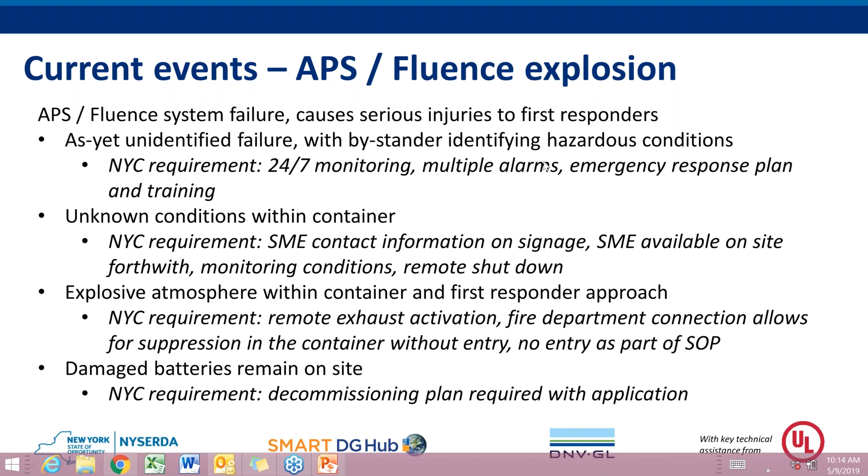Thanks so much, Paul. We wanted to go through that event specifically, with Paul's additional overlay of expertise from his time in New York City, to make sure we talked about current events, but also grounded the conversation in why we're doing this process. At the end of the day, we're trying to get safer energy storage systems, both for day-to-day use and for first responders. I'll hand it back to Derek to recap our process to date, then over to Mike for the technical aspects and desired outcome. If you want more detail on the previous topics of explosion and toxicity, you can go back to the recordings of the prior two sessions. These will just be brief recaps, then we'll get into the new content around thermal runaway.

Thanks, Victoria. Definitely a lot of important considerations to keep in mind. Essentially, the beginning of this process within New York City began specifically regarding lithium-ion and outdoor permitting considerations with the AHJs, namely DOB and FDNY. Through the Smart DG Hub, one of the programs we run, we facilitated the conversations and got the right people at the table to understand these processes, especially regarding 9540A.

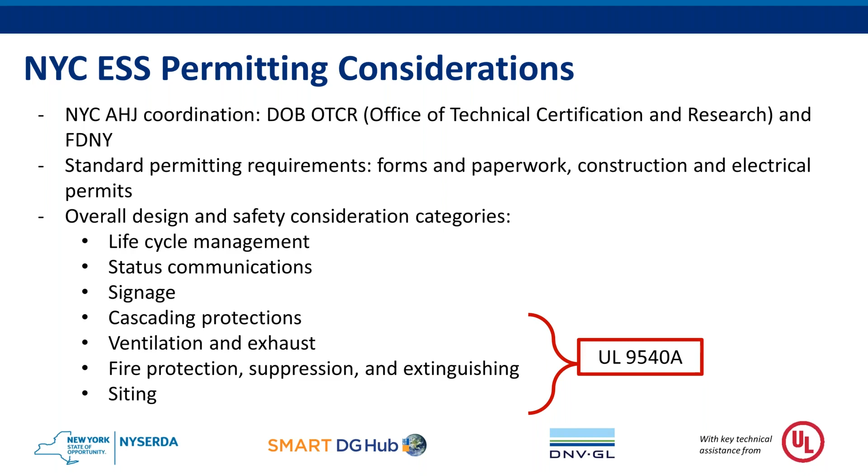Overall, large-scale fire testing is the general category that 9540A is getting at. 9540A specifically is the methodology of choice required within NYC, and we're trying to figure out exactly how to supply the data, how to aggregate it, and how to apply that data to different safety factors — things like fire and explosion protection, safety distances, as well as standard operating procedures, in terms of a lot of the topics that Paul outlined for the APS event that happened. So BMS and SOP at large.

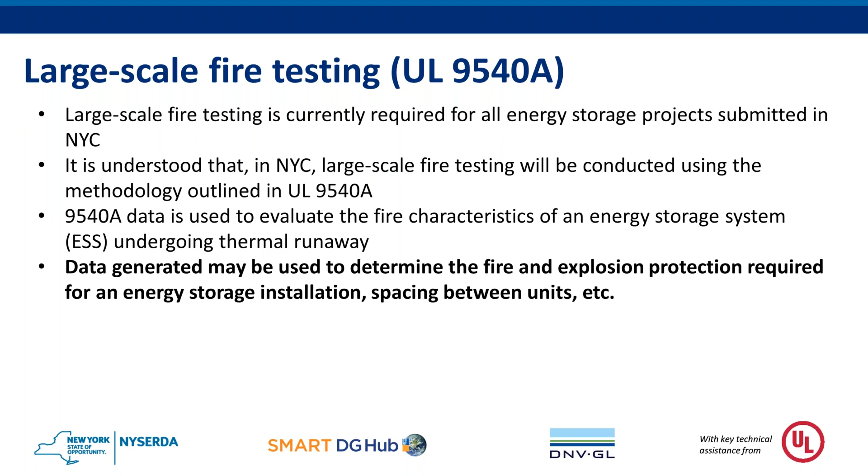Overall, we've had a lot of confusion around the details within 9540A, and we want to put the information together that we're having conversations with FDNY and DOB on, and release that so everyone understands what this test is used for, the importance of it, and its application specifically, so they can go into conversations with that information when beginning the permitting process. Through the Smart DG Hub, we've gotten FDNY and DOB together, working with their subject matter experts within their own teams, as well as technical assistance from various SMEs, including DNV, Victoria, and Paul Rogers on our team, and educational institutions — basically getting all the stakeholders together to move forward. That's basically our main role, aggregating and coordinating this process. It should be noted that specific standards from 9540A are not being developed right now — it is a guide to understanding the application of 9540A.

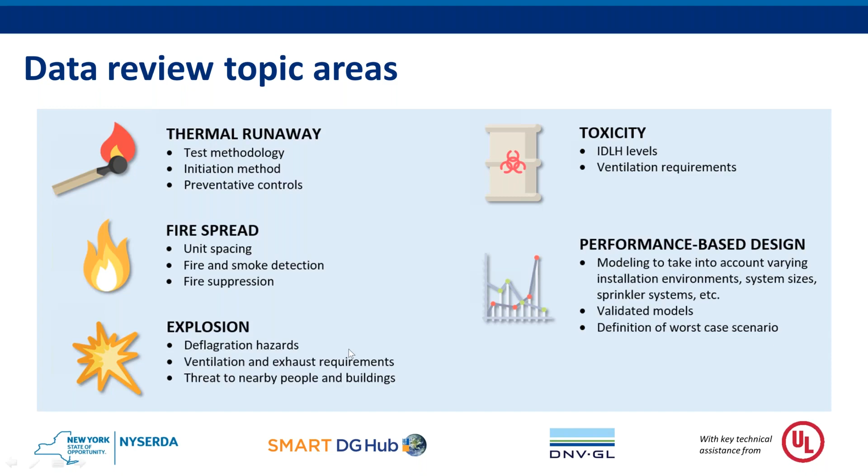So basically the overall cycle for the topics is to follow 3 weeks. So kind of an intro on week 1 with what the actual topic is, background information, and essentially agreement on the pathway that the conversations will take, and the most important information that needs to be discussed.

Week 2, we go into more kind of practical considerations with case studies from developers, the way that experiences have already been utilized through some of preliminary testing, but as well as people's experience with actually installing these systems in various locations and territories. And then, of course, after that meeting is held is when we are holding these webinars to basically recap what those conversations are and to give you an idea of where it's heading.

And the third week being the wrap-up conclusions and trying to get the correct documentation out and consolidation and agreement among all the parties. So we do have a couple more webinars coming out, but again, we are going to run into thermal runaway on this one. Next slide, please.

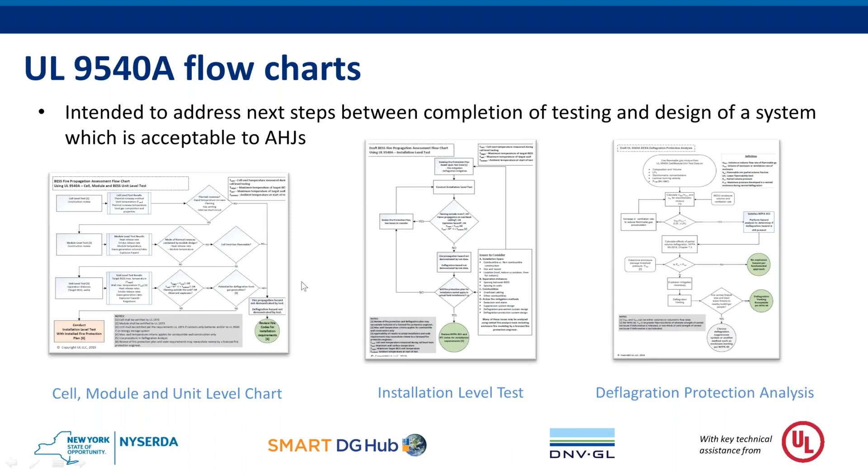As I noted earlier, if you're looking for some more detailed conversation around our previous meetings, you are certainly invited to revisit the recordings. These are not intended to be fully comprehensive recaps, but just to touch the high level and key takeaways from the two topic areas that we've closed out to date, although there are still some remaining discussions that are ongoing. So for explosion and deflagration analysis discussions, the first area that we discussed was around data sourcing.

So as was previously mentioned, and I'm sure that everyone's aware of, the UL 9540A test is required for all New York City installations. This is not necessarily meaning that you have to do a test for each installation, but for each product. The test consists of 4 different levels. So the cell level test, a module level test, a unit level test, and an installation level test, which tests suppression and similar equipment.

For explosion analysis, the data from the cell level test is utilized to ascertain the composition and characteristics of off-gassing from abnormal events with batteries. The unit level test, or in some cases the module level test, depending on how the propagation proceeds within a module, is utilized to determine the volume and flow rate of the gases that is used in explosion analysis. We've gotten a lot of questions around what is a quote-unquote approved test lab to provide this data.

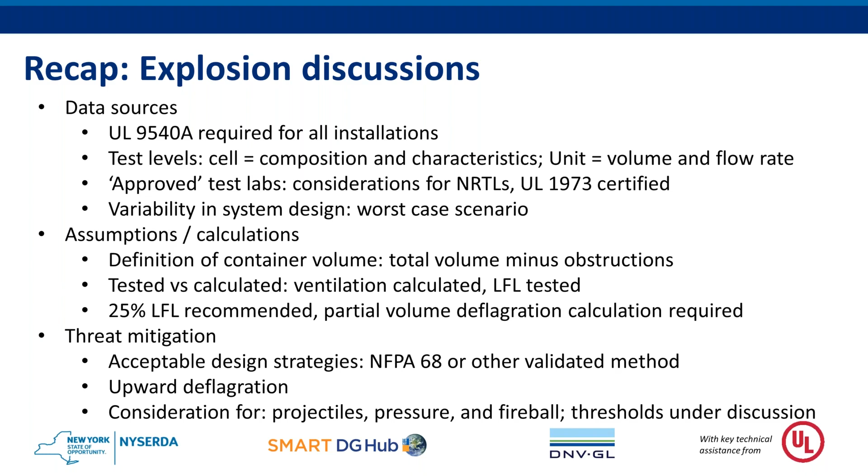The ongoing conversation, as I mentioned, is around what thresholds are considered to be acceptable and reasonably mitigated, bringing the system into an acceptably safe threshold for bystanders and first responders. But just for a generic level of understanding, you do need to consider threats from fireballs, pressure waves, and projectiles coming off of the unit. You can go to the next slide, Danielle.

So the first note is that for the first responder impact, additional calculations are not necessarily required, that it's expected that first responders will utilize personal protective equipment, or PPE, and other defensive approach tactics to ensure that they're not unnecessarily exposing themselves to toxic gases.

For bystanders, there's a current discussion around the secondary means of egress from a space, and this is dependent on the facility type and other requirements per code, building code. Similarly, exhaust locations for off-gases will be as identified in code if appropriate. So for exhaust from indoor installations, ensuring that egress pathways are never impacted by such exhausts.

Although data from UL 9540A is going to be collected, and you can identify the speciation of gases that are issuing from a cell that's undergoing thermal runaway or other abnormal conditions, that data is not expected to be further analyzed.

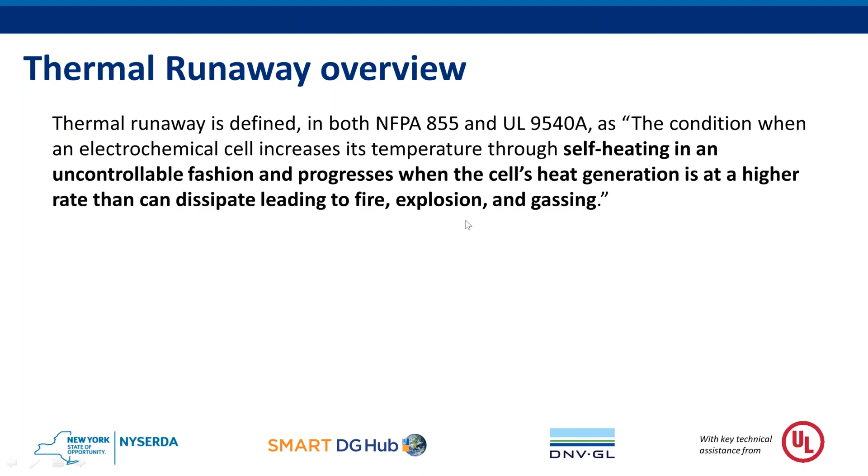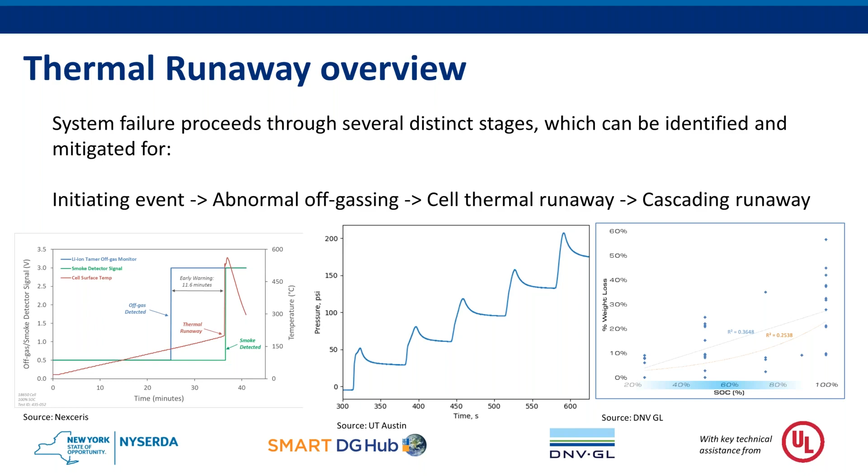So we wanted to make sure that we identified what the AHJ concerns are around thermal runaway. So we identified 5 major concerns. So first, that there are untested claims of resistance to thermal runaway. And if you click to the next slide, Daniela, we expect this to be addressed through the requirement for UL 9540A testing. The next item is the concern around undetected failure. And if you click to the next slide, the expectation is that this is addressed through both BMS controls and system monitoring that are just required prescriptively as opposed to based on results from UL 9540A testing. You can go to the next slide.

The next 3 items are around the impact from thermal runaway. So within this current topic area, we are focusing on just this initiating event of thermal runaway rather than the longer term impacts from it. So we're separating essentially the threat from the consequences. And so these following 3 items around the release of explosive and toxic gases or the development of fire conditions are being addressed under other topic areas. In fact, we just talked about how the management of explosive gases is handled as well as toxic gases. And we'll be talking a little bit later about fire conditions in our 3-week cycles.

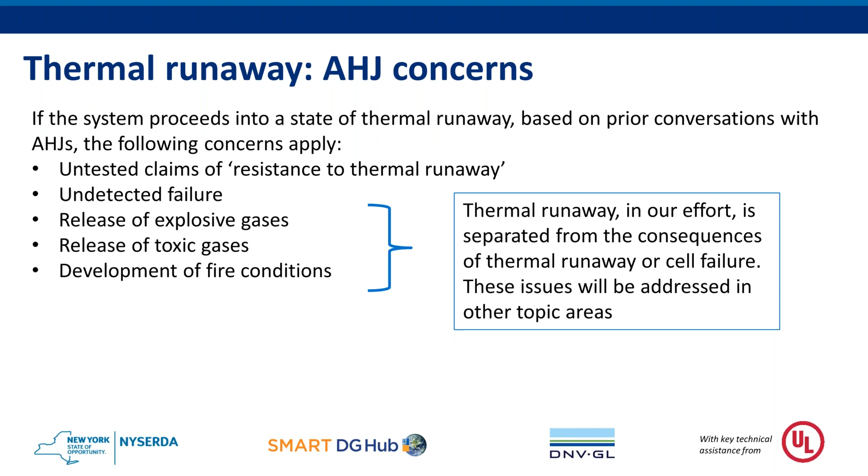You can go to the next slide.

So the key takeaway here, when we're talking about analysis requirements, and just remembering that we're coming back to UL 9540A data analysis requirements for this particular effort, is that it is expected that first responders are going to be on site after thermal runaway occurs and a larger consequence has been initiated. So either an explosion or a fire and the release of those gases, creating that potential.

And so to that end, the current understanding is that thermal runaway is managed from a testing perspective rather than additional analysis. The UL 9540A test will run a cell and a module and a system through its paces to ascertain if thermal runaway occurs. And then the other topic areas will characterize the impact of thermal runaway. So we're not in this topic area managing anything other than whether thermal runaway occurs or not.

In addition to this, one of the concerns that's come up quite a lot is: does my system have to do UL 9540A testing? We don't go into thermal runaway. Well, it's required that you go through the testing regardless, and although mitigative measures are appreciated and can and should be tested, just because there are mitigative measures in place does not indicate that testing is not required. Documentation and verification of the quality of such mitigative measures can, however, serve as useful data points for a risk analysis and a quantitative analysis of the quality of such a mitigation measure.

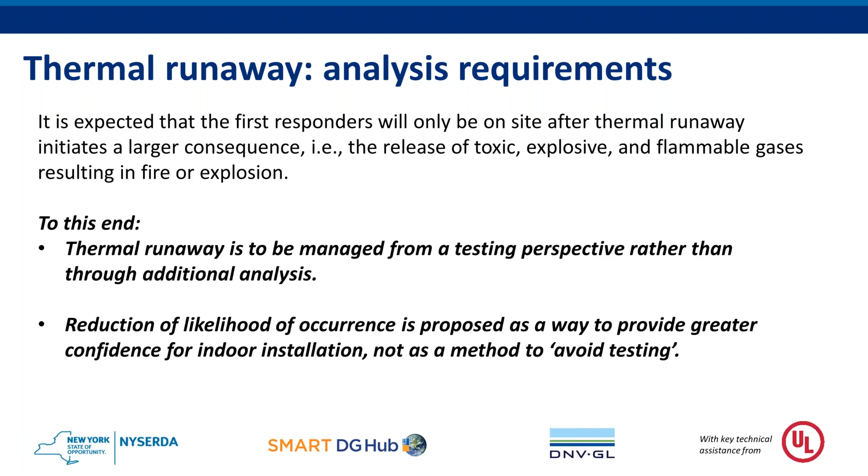So just to wrap up, as I mentioned a few different times, there are open items. This is an iterative process, and we are working constantly with different subject matter experts and gathering more information as requested to support the decision making and documentation of already made decisions of FDNY and DOB. Specifically, the critical items for explosion are how threat is defined, or how an acceptable level of risk is defined, both for first responders and bystanders. For toxicity, we're working on a benchmark for treating the off gases like any other fire condition and how that benchmark can be determined.

The next item that we're going to be working on next week is fire spread. So we're going to be starting on that topic area next Wednesday and proceeding forward as Derek described in our 3-week schedule. And we welcome the suggestion or support of case studies from any who are on the call. If there's any data or reference material that you have on fire spread and battery fire spread, suppression systems, etc., we certainly welcome that, and we would look forward to hearing from you through the DG Hub email address.